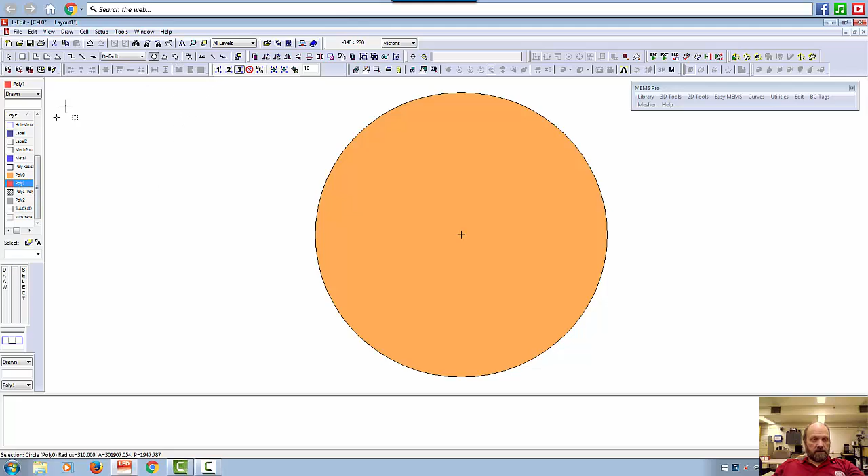Now I'm going to draw the poly 0 circle. Okay, again, start in the middle, draw a circle, go to edit object. Okay, and that one is going to be 310 microns. Ooh, it's starting to look pretty good. So what else do I have to do? Well, I got to make a hole.

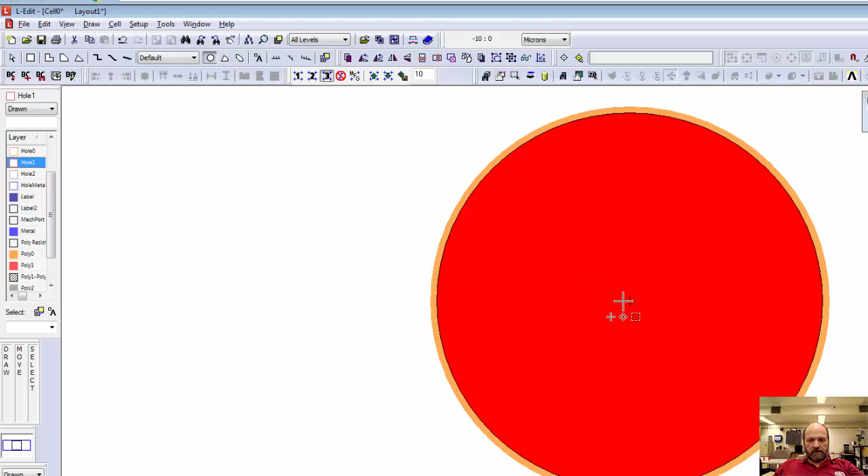So the hole is in poly 1, so that's hole 1. Again, I got the circle selected, so I'm going to go ahead and draw a circle. And the hole, if I look at my design specifications, poly 1 center hole is 15 microns. Well, that's obviously too big what I drew there. I need to make it 15. So I go edit, radius, 15. And notice I've been snapping to the center, so everything is already centered.

Okay, there's my hole. So now I got to make a poly 2 hubcap. Edit. Oops, sorry, I got to draw it first. So it's in poly 2. Select poly 2. Circle's already selected. Go ahead and make a circle. Go to edit. Edit objects. Okay, and what did I say that one was? Poly 2 hubcap is 30 microns.

Okay. So I made this crazy little structure out in the left. I'm going to go ahead and get rid of that. Control B after selecting it. All right, so what do I have now? I've got the hub, I've got the hole. I need an anchor. I need an anchor 2 because I want to anchor the poly 2 hubcap to the poly 0 substrate.

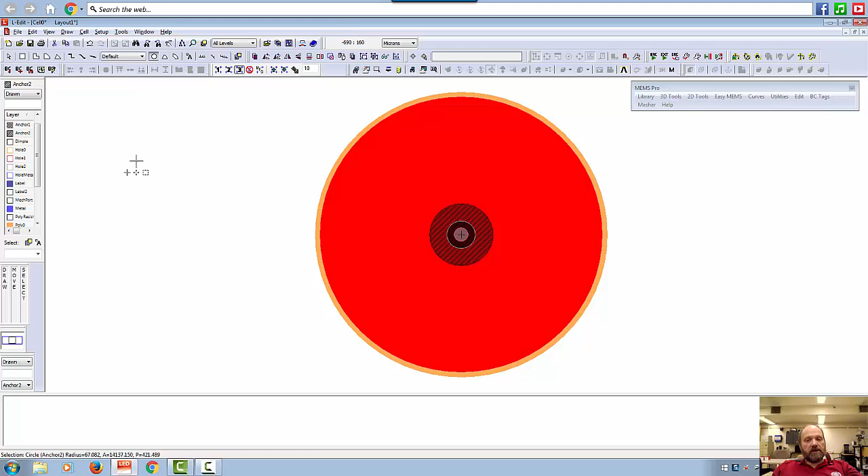So I made my anchor 2 way too big. So I'm going to go edit the object again. And that sucker's got to be, let's see, anchor 2, 10 micron radius. Okay, hit OK. Now I've got that hub. So far, so good. I got my ground plane, I got my anchor 2, I've got my poly 1 center hole, I've got my poly 1 disk, my poly 2 hubcap. So all that's left is really a dimple ring. And then finally I'm going to make the release holes.

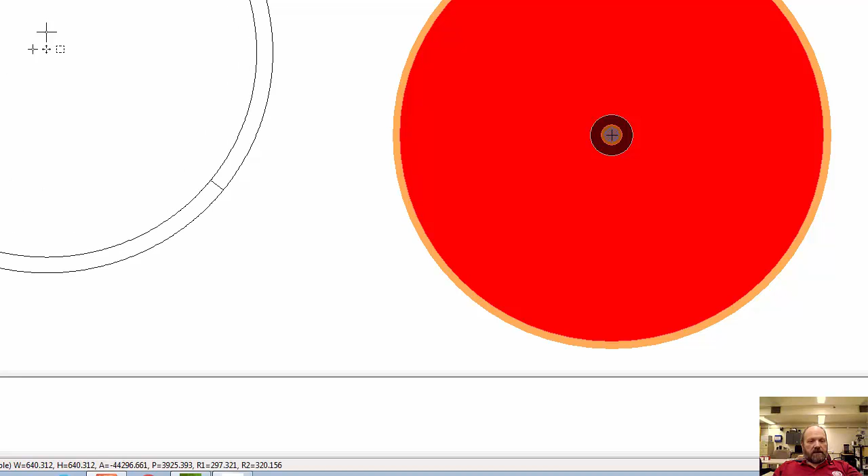So the dimple ring, remember I can use the tori function or the boolean. I like tori. It's a little bit easier to use. I go select dimple, I select the tori, and I'm going to go ahead and make it out here. There's one circle. There's another circle. Okay, now when I make a structure, it's automatically selected until I select something else. I'm going to go ahead and edit objects. Okay, and now this is really interesting. It comes up with a whole bunch of stuff.

So I'm going to go ahead and leave the center alone. I'm going to show you in a minute how to center things if you have a bunch of structures. But the radius has to be fixed. So the outer radius is 250. The inner radius, radius 1, is 245. Okay, you hit OK. Now that's the correct size. And I'm going to get it close to being centered, but not quite. You can see my dimple ring is off center.

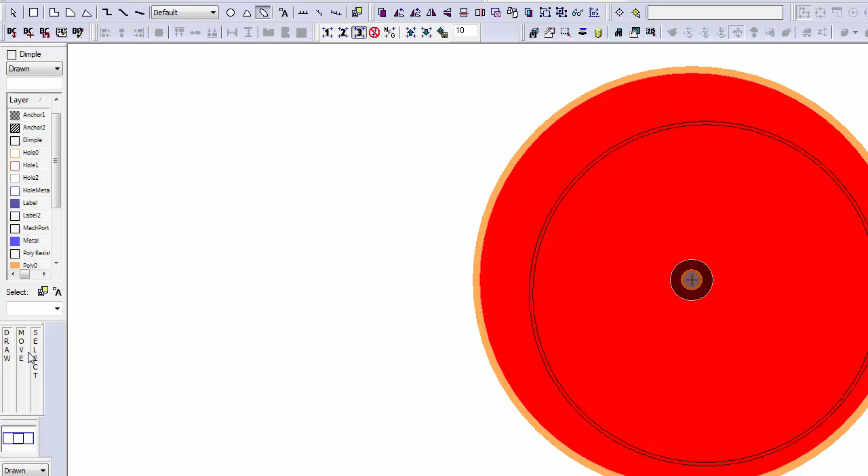I'm going to go ahead and select the whole thing. Boom. All the circular structures are now selected. I'm going to go to Draw, Align, center and middle. And now everything is centered. Okay? So now you have the entire structure done. The only thing I have left to draw are the release holes.

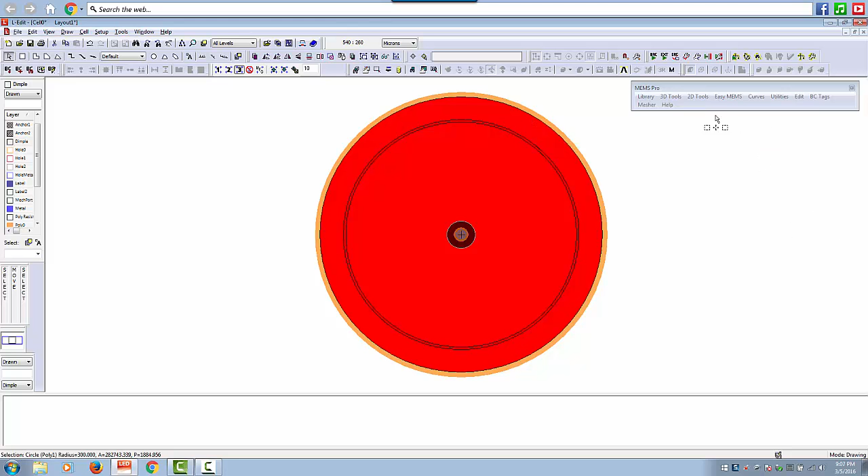So I can go in and start drawing little release holes, or I can use my Easy MEMS function. First I've got to select the structure. So I select only the poly 1 disk, and I go to Easy MEMS, hit plate release. Okay, I want my etch holes to be 5 microns by 5 microns. And the spacing, I'm going to make 25 microns. Okay, just to buy us a little bit of tolerance.

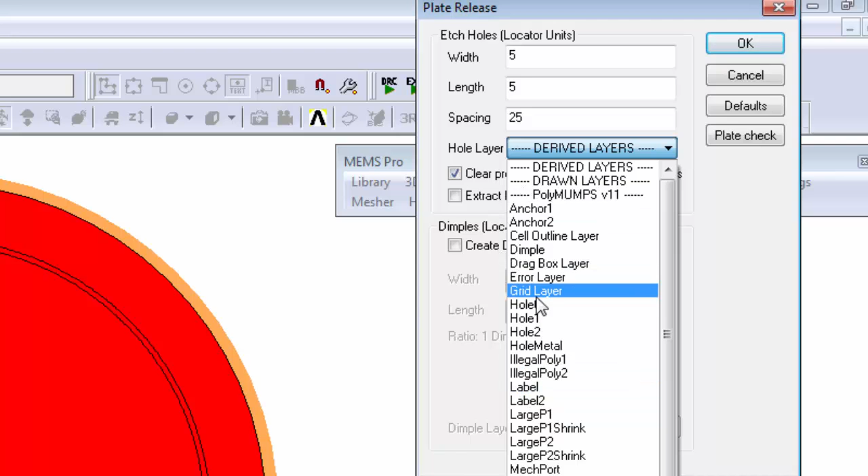And then I have to select the layer, and I went through this in another video, but I'm going to select which layer. Hole 1. So where the heck is it? There it is, hole 1. Okay, so I'm going to make holes with this array, and I'm not going to create dimples because I already have my dimple ring. So I hit OK, and there are the holes. So you can see we've got some release holes that were thrown in at the hub, which is probably not a good idea. All right, so I'm going to go ahead and zoom in.

Okay, and then I'm going to go to the snap of 1 micron, so I can select these things. I select one, do Control B, select another one, and delete the wrong thing. Always have to make sure you delete the right thing. You might end up without a hub or something. Okay, so you get the idea. You select the individual ones that interfere with the hub.

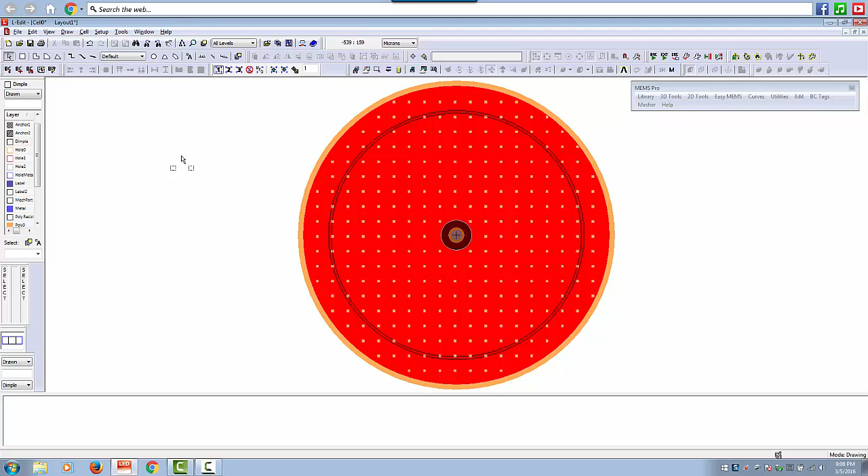Then you can go back to View, Home, get everything that you just drew in there, and then you can start deleting the things around the edges if they're too close. But you have to remember that the release holes are part of the Poly 1 mask, so you don't have any alignment issues to worry about. Okay? The only other problem, other than the hub, is interference with the dimple ring. You don't want to put one of these release holes right on the dimple ring.

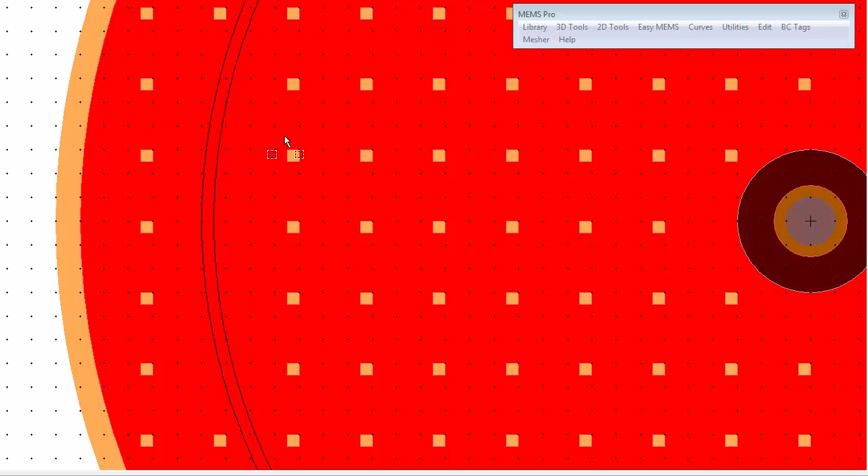So if I go ahead and zoom in on this side, you can see all of these release holes are interfering with the dimple ring. So I'm going to go ahead and use my selection tool and select the ones that are interfering, then do a Control B and get rid of them. Okay? And sometimes you might have to move a few of these around.

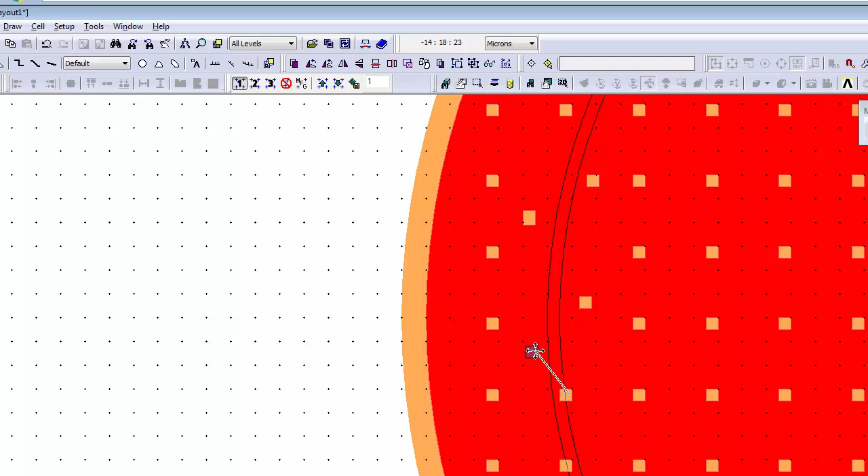The other approach you can use is you can select one of them, okay, and you can move them off of the dimple ring. So you can do that. Okay. You can't really have too many release holes, but you can have too few. So you can kind of move these things around, and that way you can also make sure you're not interfering with the dimple ring, and make sure that you have enough holes to be consistent with the design rules.

All right, so that's all of it in a nutshell. And I'm not going to finish getting rid of the other release holes that are in the way of the dimple ring. I'll leave that up